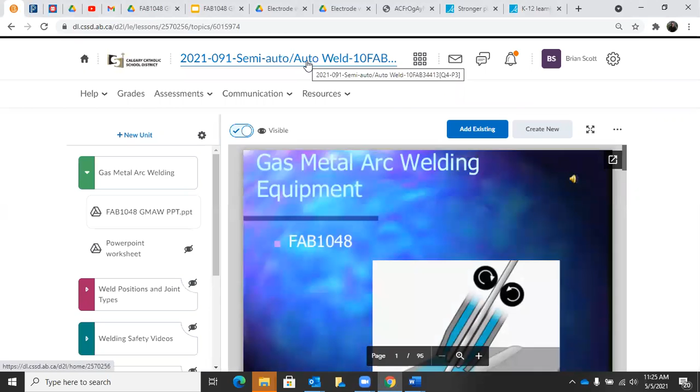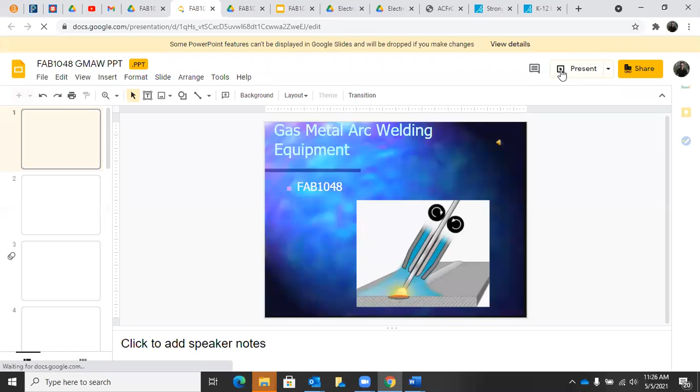So I will start sharing my screen now and we will get this going. So we're going to go to Brightspace. What I've done is in our semi-auto welding unit now, I'm going to switch to student view so you can see what it's going to look like from your perspective. So when you flick into your semi-auto unit, you're going to see this. Just like normal, we're going to go to resources and then down to content. From there, we're going to see gas metal arc welding, that's the unit we're going to work in. And we have our 1048 gas metal arc welding PowerPoint. So this is student view, this is exactly how you would see it. You can pop it out here, and then you can open with Google Slides. And then what I do is I always present from there. You guys have access to this, I've given you all access to it, and this is how I show it for you guys. If you're ever looking at a slideshow and you want to see it just how we do it in class, it's going to be done just like that.

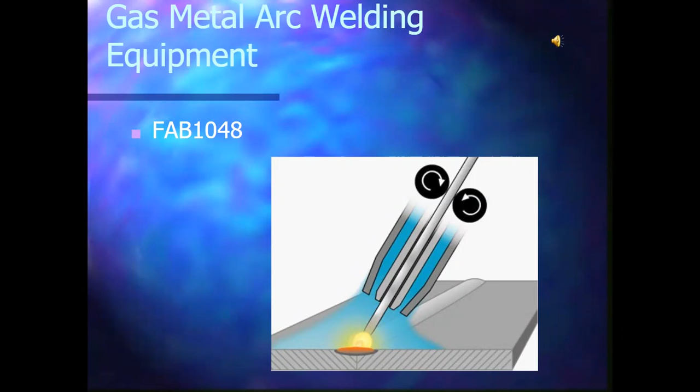So gas metal arc welding equipment, unit 1048. It's awesome, I love gas metal arc welding. It's a neat process, it's not a new process. It's been around for a while, probably since about 1924. A gentleman named Alexander patented it in about 1924. Pretty neat - oh, there's the patent drawing. So what we have here is a lot of very, very similar components to today's modern gas metal arc welding setup. It's taken a bit of a different form, but we have a lot of similar stuff. Now this one back in the day was set up on a positioner, so they'd use an arm to control the height of this above the steel to be welded. And it wasn't as mobile as ones we have today that we can hold by hand.

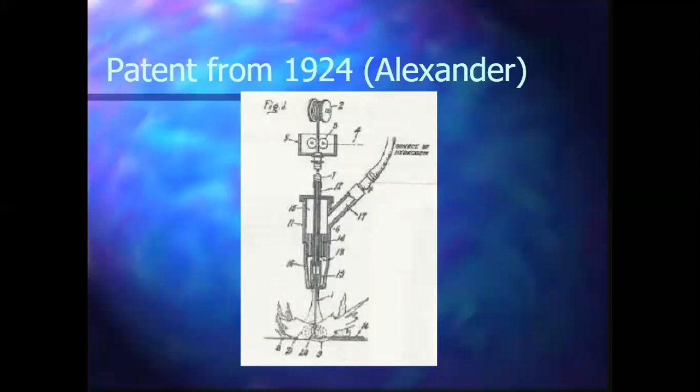But a lot of the parts and pieces are all the same. So we've got gas delivery, we have our contact tube, our contact tip, we got our liner at the back, we got our drive rolls in the middle and our roll of wire at the top. So it's very similar to the process we use today. In fact, the process we use today honestly hasn't changed that much. The components have gotten better, smaller, more efficient, but it's all very, very similar as to what it was back in the day.

Gas metal arc welding principles of operation. We're going to go over what makes this tick and how it works. Gas metal arc welding is defined as a process that joins metal using a continuously fed wire electrode.

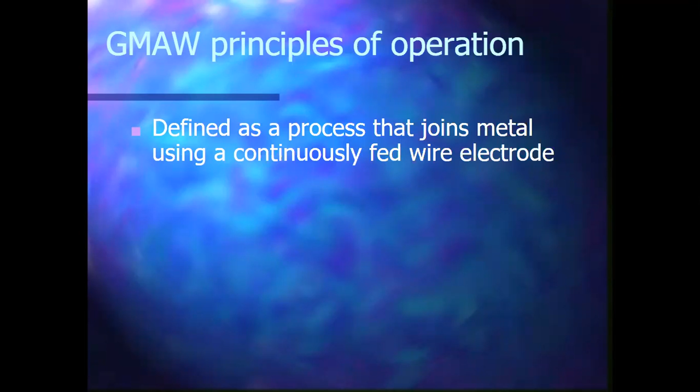The rolls we use in our class of electrodes are generally about 44 pounds. It's a small thin wire, 0.035 of an inch in diameter, and there's probably miles of it on that roll. I've never done the math to work out exactly how much there is, but it would be a neat project, and I'm going to do that one day. We're going to use some mathematics to calculate approximately how much is on a roll of wire. That's pretty neat, I'll have that number for you one day. It's a lot though, I can tell you that.

Atmospheric contamination is prevented by using an externally supplied shielding gas. With these welds, when we take part in the welding process and create that weld, we actually need to protect it from the air we breathe. The air we breathe is not going to be good for the weld. It's got a lot of nitrogen in it, CO2, oxygen, and oxygen in any amount over a couple percent is not good for welds. So what that does is create an effect on your weld called porosity.

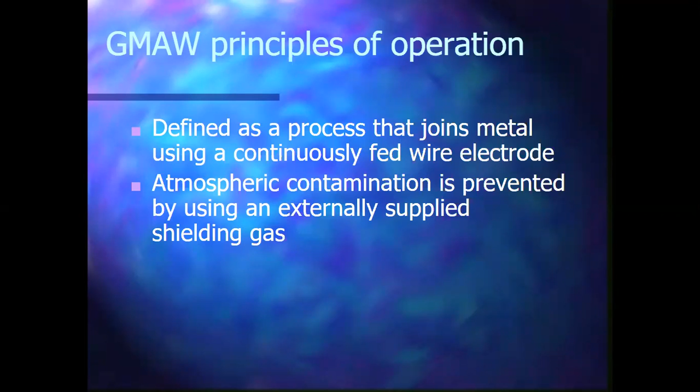Porosity is going to look like you bit into an Aero bar. An Aero bar, as we all know, has a nice smooth outside and is full of holes on the inside. That's what our welds are going to look like when we weld without gas. In fact, there's going to be a little bit of bubbling on the outside too, but the whole inside is going to be full of voids and hollows, and that weld isn't going to have any strength at all. That is a bad defect, probably the most common defect we see as welders, and it's the one we need to know how to avoid.

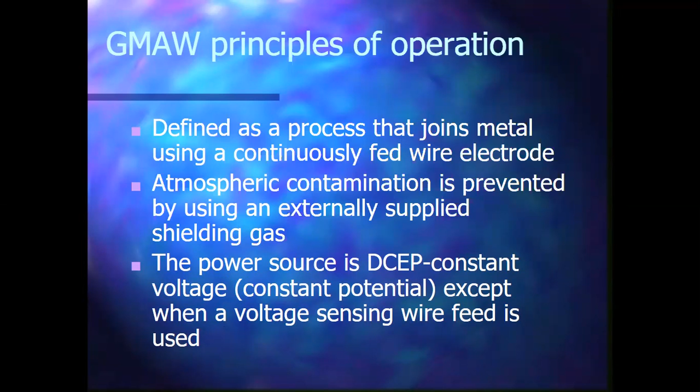The power source is direct current electrode positive. That's what DCEP stands for, direct current electrode positive. It's also known as constant voltage, except when a voltage sensing wire feed is used. There are multiple different systems that we can use to do this, and we're going to go over them bit by bit. I'm going to try to break it down in a way that isn't confusing, because there is a lot to go over.

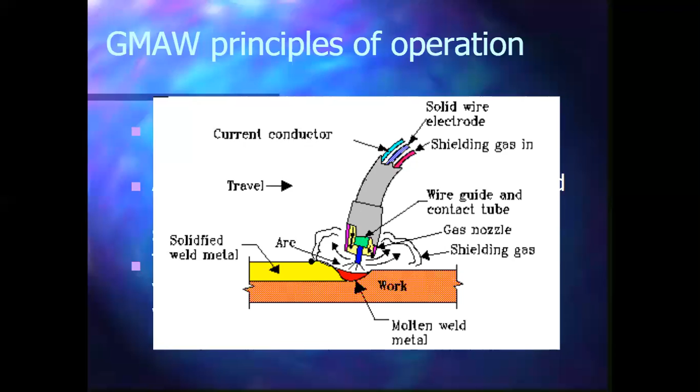So the principles of operation. A lot of people call this MIG welding, and that's a term that's been used forever, and there's nothing wrong with it, except in today's time we're leaning towards calling it gas metal arc welding. MIG is not quite an accurate term because CO2, under the right conditions, is not inert.

So MIG, metal inert gas, is not quite the best term for it. Gas metal arc welding is GMAW. That's what GMAW stands for. In most processes we use the term MIG because it rolls off the tongue nicely. But CO2 is not inert, I've just been over that. The term gas metal arc welding is more accurate.

The whole reason why we use gas metal arc welding, just the welding process in general, is it's quite fast. It's good for production, and if we are manufacturing lots of small parts, it's much more efficient as far as its use of the electrode, that core wire, than processes like shielded metal arc welding, which we'll focus on in the next unit.

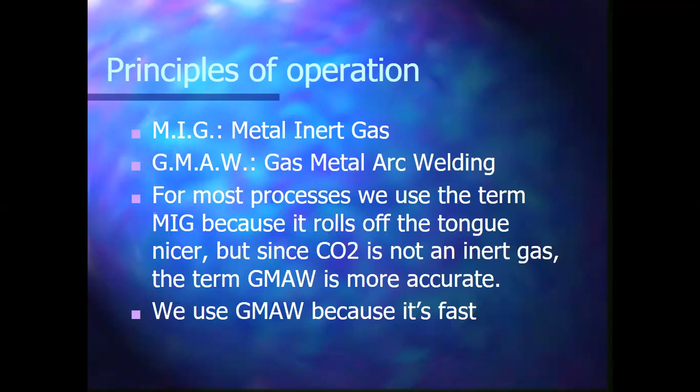So there are some other things in the semi-automated and automated process. I talked about flux core arc welding a little bit. That is very similar to MIG, except the wire composition is different. It's got a different type of wire that we use, a little bit bigger as well. And shielded metal arc welding, stick welding, is a process we're going to focus on in the 1050 unit. I'm not going to explore it too far or go into it any more than we need to today.

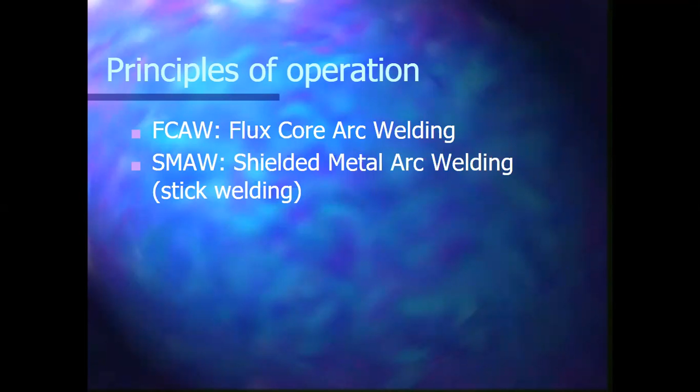So we have equipment for gas metal arc welding, and this is basically all the components you need to set up a hard wire welding system. When I say hard wire, I just mean a solid wire like an S6. S6 is going to be completely solid, whereas some other wires are hollow and have filler in them, and they can be used without a shielding gas. That's the flux core process.

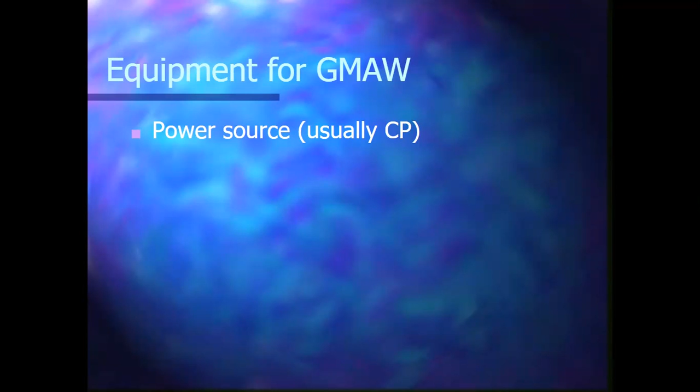So we need a power source, and that's usually constant potential, which is what CP stands for. We need a wire feeder. That wire feeder is basically what drives and pulls the wire off the roll and feeds it out the end of the gun, so it can be energized by the contact tip and then burnt off into our weld.

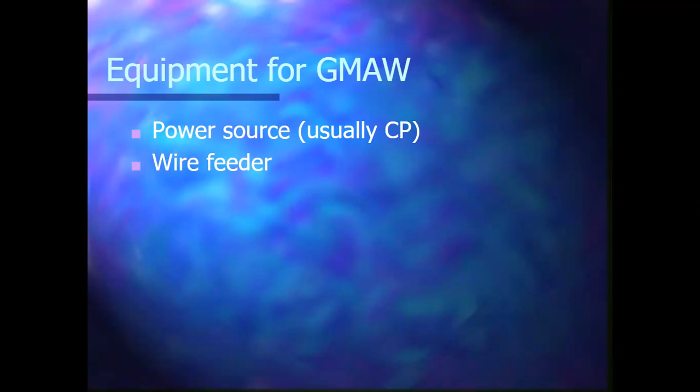We need our welding gun and our cable setup. The welding gun is going to have input controls, or remote controls, basically just trigger controls. You pull a trigger on these guns, it's usually yellow, and that tells the motor to start feeding wire. There's a few things that happen when you pull the trigger, we'll get into that in a little bit.

You need some filler wire, something to weld with, some material to form a weld with. And you need shielding gas and control equipment. Otherwise you will be doing a bunch of welding, but it's going to look like doo-doo because you have no shielding gas and our atmosphere's got in there. We got all sorts of oxygen, CO2, nitrogen up in there.

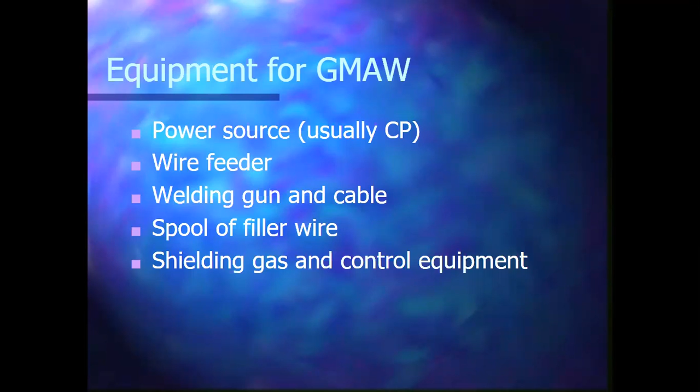I think our atmosphere is like 78% nitrogen. It's pretty crazy. Oxygen's like 21%. Then the remainder is made of CO2 and some other little things. But yeah, it's a lot of bad stuff for welds. Basically, that's the long and short of it.

So power sources, we usually use DCRP. Now you're going to see a lot of acronyms in here, and they can be quite confusing, and I still even have trouble with them, so if you're a little lost, don't feel bad. DC simply stands for direct current. No, it's not the shoe company, I know there's a DC shoe company, but this is not what it stands for.

So DC, as an electrical term, is direct current. RP is going to stand for reverse polarity. You'll see RP sometimes and you'll see SP sometimes, and they both mean different things. RP is electrode positive, SP is electrode negative.

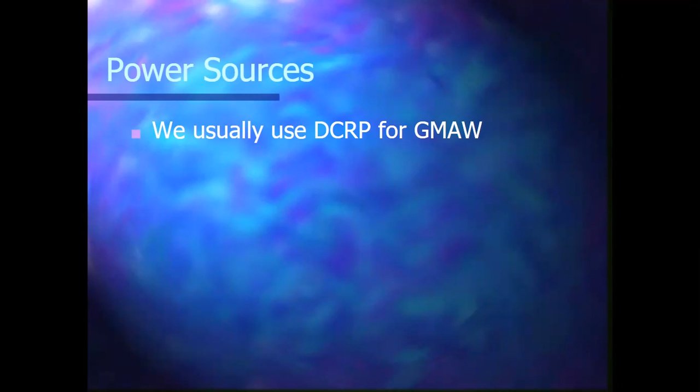We'll get further into that. We'll hit those points again as we carry on.

The nice thing is, a motor-driven generator gives you your welding power and also 120 and potentially 240 power. So you can run tools off of that generator and welder. I don't recommend running them both at the same time because it can be hard on the motor, but generally if you're welding, you're not grinding, and if you're grinding, you're not welding. So you pick up one process, set that down, then start the other.

Transformer rectifiers, that's a type of welding machine where we bring in a low input power and step it up to a bigger, usable power with a transformer. We also have inverter technology, which does a similar thing on a very small scale. They're light, kind of the newer technology ones.

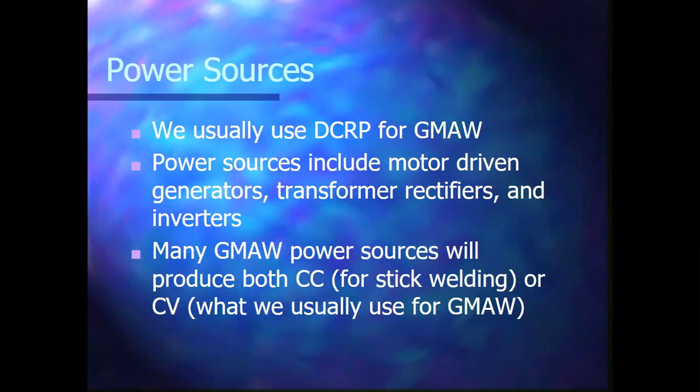Many gas metal arc welding power sources will produce both constant current, that's what CC stands for, for stick welding, and constant voltage, which is what we usually use for the gas metal arc welding process.

Here we have a general picture of a gas metal arc welding gun. We have our connector on the back, which is going to have a few pins, and then we have a positive and negative lead here.

Now, some of these guns can be water cooled. In fact, this gun may be water cooled. Looking at it, it's got a sheath and a cover over it. If this gun is designed for high amperage, something like metal core or big flux core, it's most likely going to be water cooled, because electrical components and heat don't go well together.

I don't know if you guys have ever left your phone out in the sun, but you'll see a temperature warning, and it'll shut down all functions basically until it cools down. That's to protect its internal components. The same thing has to happen on these guns. We can run a lot of power through these guns, and when we do that, we start heating up components and wearing things out. We can even start burning up components, and these guns are not cheap.

So some of these guns, like you see here, have these two little hoses on them. It's an inlet and an outlet, and that's for a cooling tank and a water pump. This connects and it will circulate cool water through the gun, kind of like how a radiator system on a car works. It'll run water through, cool it in a radiator system, and pump that cooler water back through, maintaining a nice usable temperature for the gun.

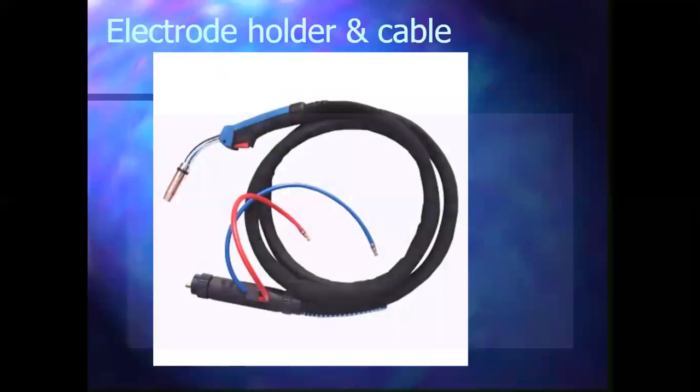Gun and cable assemblies are rated by their current carrying capacities. We have some examples in the shop here of some very small, light hobby machines that are good for maybe 100 amps, and then we have some big ones rated for 300 to 400 plus amps. We generally don't run them that high, but you'll notice all the circuitry, all the components are much bigger and heavier.

It's kind of like looking at a small quarter-ton pickup and a 1-ton pickup. You're going to notice size differences. Everything's going to be bigger on the 1-ton pickup, and that's simply to help it perform the task better. The same thing applies to these welding gun and cable assemblies. You don't want to put a great big heavy load in a little quarter-ton truck, it's not going to work well, you might break it. Basically the same thing applies with small welding guns. If you try to run big amperage with a small welding gun, you're going to cook that sucker real quick, and then it's no good for you.

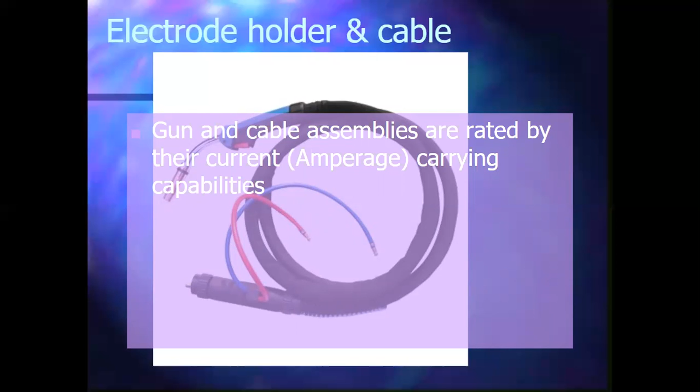Cable assemblies are designed to carry the shielding gas, the current, the wire through a liner, as well as wires for the control mechanisms such as the trigger. So there's lots going on in those cables. It's not just a hose and a wire.

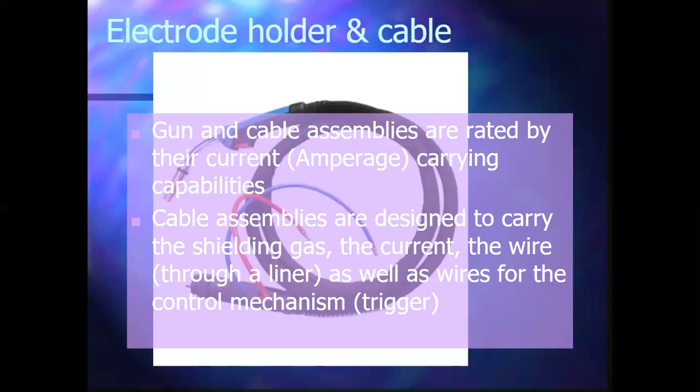So the filler wire we have is pretty neat. It's cool technology. Designations—well, let's back this up a second. These filler wires are classified into two main classifications.

AWS is American Welding Society, and CSA is Canadian Standards Association. These are the bodies that regulate the production of these filler wires. The wires get made, then tested to a certain standard. AWS has their standards and CSA has their own. You've heard me talk about CSA before—it's that green triangle on the steel toe boots. It's the people that test our safety glasses, making sure everything meets standards before it's sold to the public.

Basically, manufacturers make the wire, these companies test it, and they say yep, you're good, you met our standards. So it can be sold to the American and Canadian markets if it has both these designations.

So the wire we most commonly use here is an ER70S6. That is a solid wire. It's copper colored because it has a very thin copper coating over the wire. The wire is pretty much all steel, but there's a thin copper coating to help protect it from corrosion. Sometimes here in Alberta, if I had a roll of bare wire sitting out on a welding machine for a few months, it would start to rust pretty good. We have our seasons—spring is a little more humid, it's wet out.

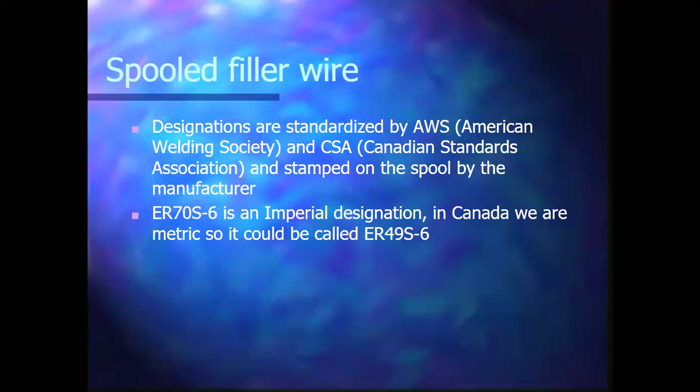So what we're going to do is back this up just a little bit. Here we go—a little bit of info on what that number means and how to read it, because right now it probably looks like a foreign language to you. But as we get into it, we're going to break it down and hopefully bring a little bit of light to it so you can understand it a bit better.

So we're going to start right at the top, and we see we've got two designations: S or T. S is solid, meaning if you cut this in half, it's steel wire the whole way through, with a bit of copper coating, but solid steel the whole way through.

Some of these wires are a T, like a T11, a flux core wire. You could cut it in half, you'd have to pry open the end a bit, but that wire is actually rolled up like a burrito. Inside is a flux, with metal filler components, gas forming components, and cleaning agents as well. The flux core is a pretty neat process, and the wire is literally like a little burrito.

We're going to look at this first digit here, an alphanumeric designation. We got E, E stands for electrode - that's pretty simple, that's what you pass the electricity through to make the weld. R just stands for rod. Even though we call it a wire, technically it's just a really skinny, really long rod that we've decided to wrap up on a spool. So if you see ER, it's just electrode rod, and you'll see that with like E7018. That's a stick welding rod, a very common welding rod.

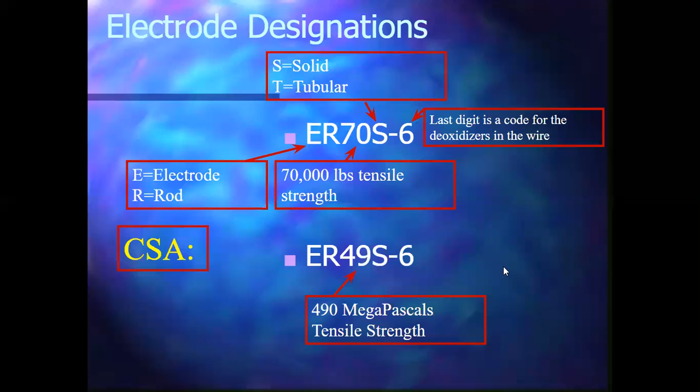So the top one's AWS. Shielding gases - this is what protects our weld from atmospheric contamination. Shielding gases can range from argon to helium to CO2 and even oxygen. Now, oxygen sounds crazy, but in small amounts it does wonderful things for our welds, and when I say small, I mean 2 to 3%.

So some of these gases will be just a single gas. If we're using TIG welding, we're using argon for back purging. If we're running a bunch of MIG welding and we want to keep our costs down on gas, we can run straight CO2. Straight CO2 doesn't give us a very nice bead appearance, so what we do is use a bi-mix, two gases on our MIG welders, to give us a nice appearance - a 75-25, running 75% argon and 25% CO2 mix.

So that mix is called C25 or Star Gold. Every manufacturer is going to have their own name for it, but the recipe is pretty much the same. These are recipes that people have found to work over time, stuck with them - they're tried, tested, and true. So I use C25, that's a 75-25 argon CO2 mix, in our shop.

Sometimes you get tri-mixes, three things, and even quad mixes. Sometimes you'll see mainly argon, a slight bit of CO2, a little bit of oxygen, and some helium in there. Some of these are more specialized. I've never had to do anything like that.

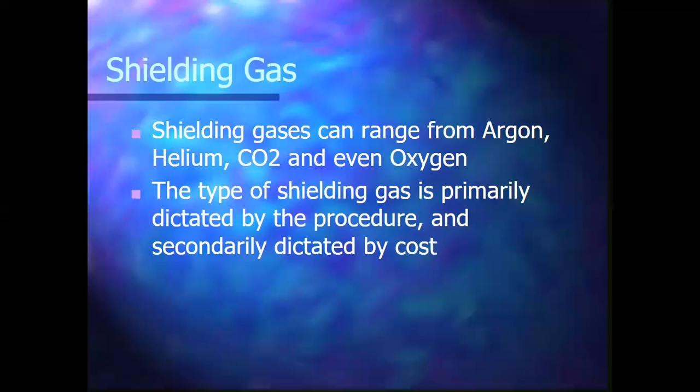If I'm building a bunch of stuff that is going to get hidden somewhere that no one's ever going to see, and doesn't necessarily have to look the prettiest, definitely you can buy three bottles of CO2 for one bottle of C25. It's way more cost effective. So yeah, just think about it that way. CO2 is prominently used because it's cheap, that's why.

Okay, so when you get those bottles though, those bottles are sitting about 2,000 PSI, maybe 2,200 PSI sometimes. So a lot of pressure in there. So we need to have a device that takes that big bottle pressure to a working pressure, and that working pressure is what comes out the end of the gun. That device is called a regulator.

That regulator and a flow meter. The regulator basically sets the bottle pressure down to a working pressure, and the flow meter maintains that constant flow of gas out the end of the gun. Some of these are combined, some are separate, it really depends on the setup. There's multiple different types of setups, but the ones we have in class are fairly easy to operate.

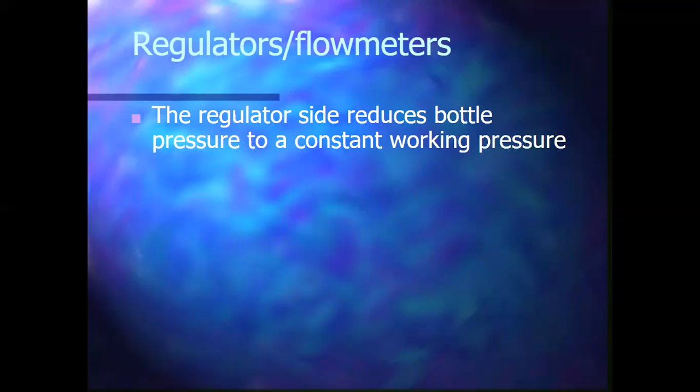So you're gonna see a hand wheel on the top of the bottle. You're gonna open that up and there's gonna be two dials on the regulator and then a hand wheel on there. One will show your bottle pressure, one will show your working pressure. These are quite simple to use, and they're very nice because they hold their position, they don't drift, they don't creep.

The flow meter side controls the rate of flow. It can be adjusted by the operator and displays flow in liters per minute or cubic feet an hour, so it'll be LPM or CFH. I generally use CFH, and I use 25 CFH as my flow rate for the welding that we do, 25 cubic feet an hour of gas.

Here's a little question for you guys. Flow meters are usually gas specific, do we know why? There's no wrong answers on this one, so don't be afraid to say something. No one's got anything? All right.

So the reason flow meters are gas specific is because gases have different specific gravities. So helium, what do we know about that? It floats balloons, right, lighter than air. About CO2, a little bit heavier, right?

I don't know if you guys have ever seen it on YouTube. They'll take a fish tank, fill it up full of CO2, and float a paper boat in it. Looks like it's floating. Well, that's because it's contained within that vessel, the fish tank, and it's displaced the oxygen in there.

We suck back a bunch of helium into our lungs, not recommending that you do that, and we get that high-pitched voice, right? Density comes across our vocal cords differently. Then we do what, I think it's sulfur hexafluoride or something like that, and we get that really deep, dense voice. You're breathing in something quite heavy. I don't recommend doing this because what's happening is you're displacing standard oxygen from your lungs, and we need oxygen for our body, respiratory systems, our brain to function. A short little haha, that's kind of funny. Doing it once or twice might be okay, but don't do this long term. You're basically going to be killing off brain cells and damaging yourself. Not something I recommend. Different gases have different specific gravities. That's the answer to that one.

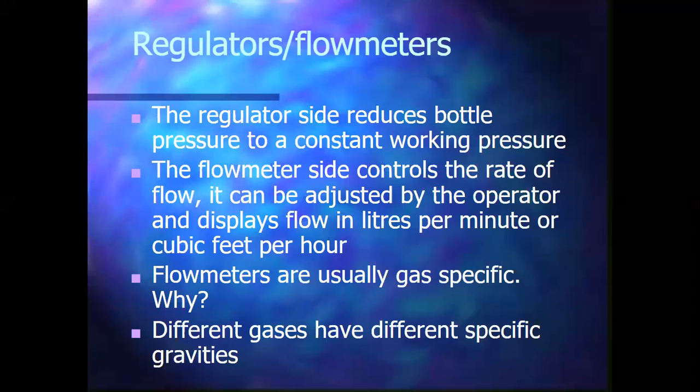Too little, you're getting porosity. Too much, you're getting porosity. That's because there's turbulence coming out of there. So gas is kind of like water - it has to be unobstructed when it flows.

So the Bow River, normally, flows nice and calm - things are awesome. But in 2013, great big flood - the river was raging, water flipping everywhere. You got white water in a lot of places, big waves, lots of turbulence. Same thing happens to gas when it flows in the air. If you get the right amount of gas, it flows nicely and calmly over your weld. If you get a whole bunch too much, it's ripping through there, hitting the bits of spatter on the end of your cup, swirling, not covering your weld fine, and getting a bunch of oxygen in there. It's kind of like when people talk about whitewater rafting - the water gets turned up so much it takes oxygen in, and there's a bunch of oxygen bubbles in the water. That gives it that white effect.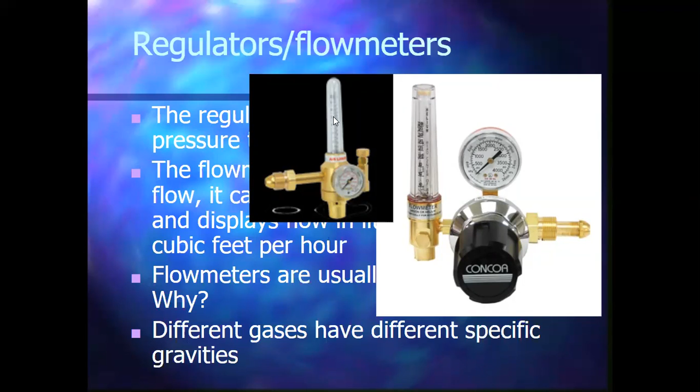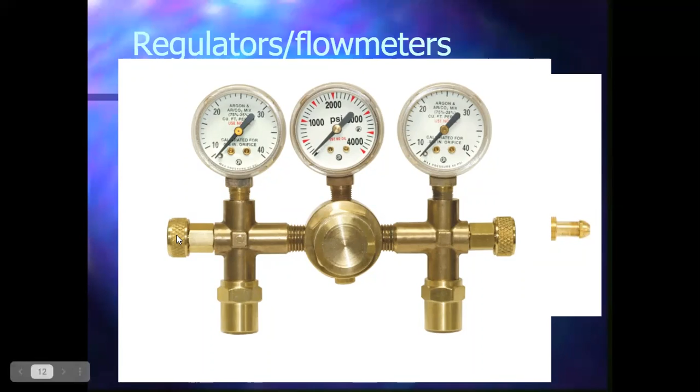We can also get these for more than one welding setup. Sometimes people will set up welders where they weld two different things, or they've got two different welders, and they'll run them off one bottle because they're both using a process that uses the same gas. So you can independently control these - you've got one that can come out the left side, one that can come out the right side, and they can be independently controlled via these little hand wheels here. It's kind of cool - saves us buying extra equipment.

When we are welding, we're getting some neat metal transfer, and that metal transfer is a cool process. It actually happens in 3 different ways. With this type of welding that we're doing, we're going to stick to one process, and that process is short circuit welding. Short circuit welding is where the wire physically comes out of the gun, makes contact with your weld puddle, touches - there's an electrical short, it pinches that off when it heats up using the electrical arc, retracts, and then comes forward again and touches that puddle. It basically touches that puddle a whole bunch of times really quickly, something like 300 times a second. It's very fast, but it has to physically make contact with that puddle to create the short to weld.

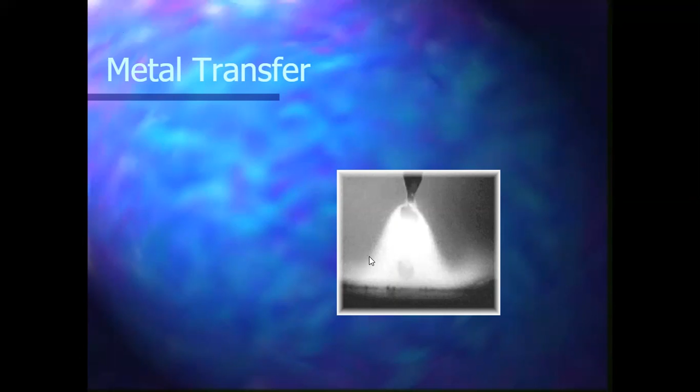There are other processes like globular transfer. It basically throws globs of metal across the arc, and that's actually what you're seeing in this little picture here on the front of the screen. You see a glob ready to get tossed off the end of the wire. This is actually the end of the wire, this is the electrical arc or fan, and here's the glob just about ready for touchdown on the base metal. Pretty neat.

So we got short circuit, we got globular, and we got spray transfer. Spray transfer is a lot like globular transfer, but instead of big globs of steel across the arc, it's shooting a fine mist of metal across the arc. Hundreds of small individual little droplets of steel. Very, very, very small.

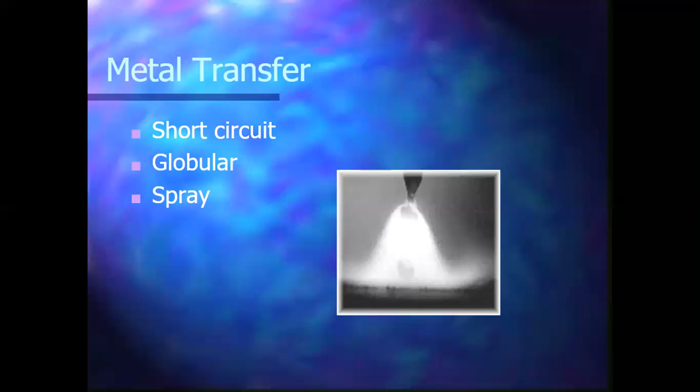So we're gonna talk about short circuit, maybe the 3 processes, and get you out of here for the day, but we'll see where we end up at the end of this one. There's a fair amount to go over, so this will take a day or 2, the slideshow, but we're gonna get through it. So, short circuit metal transfer.

Here's the process. Drop your helmet, you pull the trigger, you're ready to weld. So the trigger is pulled and the wire makes contact with the base metal. So let's back up a little bit before that. When you pull that trigger, what happens?

3 different things. That trigger tells the drive motor, all right, I want some wire, give me wire. That drive motor says, all right, sir, you got it, starts feeding you wire. Then also at the same time, it sends a signal to the gas solenoid. It says, hey, I'm going to do some welding, I need some gas to go with it. Gas solenoid says, you got it, start sending that predetermined amount of gas down the gun to your weld.

The first one activates the wire, so wire starts coming up. Second one is the gas starts coming up. Third one is it sends electricity to the end of that contact tip. The end of the contact tip is right at the gun, that's what transfers the power from the machine to the wire. And it says, hey, we need some power down here to burn this off. So that fires up, energizes too. Without those 3 things happening at one time, you don't have a weld.

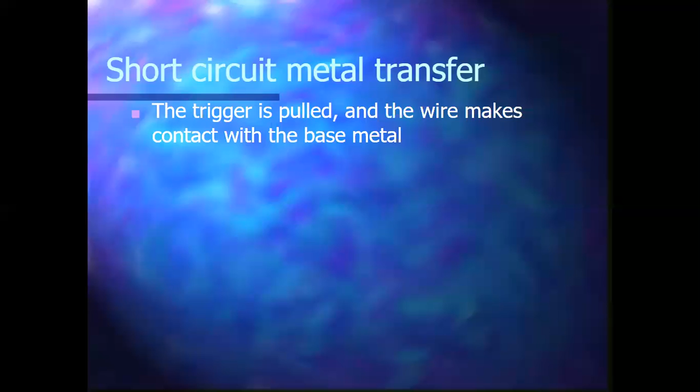So what happens is when that wire comes out there and touches the steel, makes contact with it, the voltage drops down, the amperage spikes way up there because the machine is trying to maintain this arc. It had this fan going, but when that wire touched the steel, it shut that fan down. So that creates a dead short. The voltage drops, amperage spikes, that machine's trying to clear that out because it wants to maintain that arc and keep that electricity flowing.

What happens is called a pinching effect. This is where it melts a wire off the end, or melts a little glob of steel off the end of the wire via a pinching effect. Once it's pulled that off and it opens up the slightest of little gaps between that ball of steel you just melted off and the end of the wire, that fan, boom, pops right back open again.

It goes, yes, all right, amperage starts to drop down, arc voltage pops up, and it's trying to hold that fan all nice. And it does a good job of that. But what happens again is as that wire gets closer to that steel, because it's always continuously feeding, that wire makes contact with the steel again, boom, voltage drops, amperage spikes up there. It says, we got to clear this dead short. Pinching effect happens, pulls that bit of steel off, voltage opens up again because you got that arc, the fan opens up, life is good for a very, very split second again until that wire comes down and touches the puddle again. That's basically how it works.

It's a neat process. It happens hundreds of times a second. So very, very quick, but this is how it works. The wire is fed faster than the arc can burn it off, and the wire makes contact with the base metal. That creates that dead short we talked about. So that's when the voltage drops, amperage goes way up, it says, hey, we need to clear this jam up, and it happens again and again and again and again.

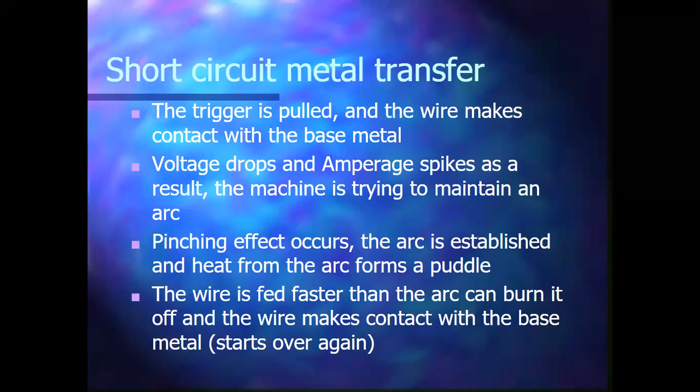So when we get in here and do some short circuit welding, you'll hear a ripping sound, like an electrical rip. That is that process happening very, very, very quickly. We'll tune our machines, you can tune it by sound, I'll show you how to do that. We'll tune these machines in and you will be able to hear it. And then we'll show demos of what's good and what's not, all that fun stuff. I love doing this.

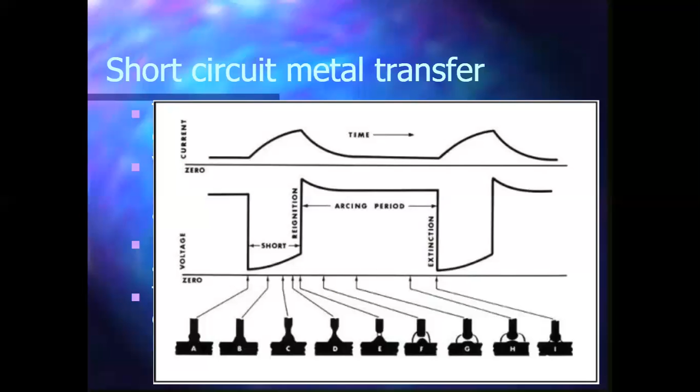So what we can also have in this, basically in the system, are some parameters that aren't good because we manually set our parameters. We tell the machine how we want to weld. We basically create our own welding recipe when it comes to these machines. The recipe is pretty simple. We put in our gas, we put in our gas flow rate, we put in our wire feed speed, how much wire comes out the end of a gun in a minute.

Then we put our voltage. The voltage is what helps burn this off. So those are our inputs that we have. So we got a 4-piece recipe, but we need to know how to manage to create these welds.

So what can happen is you have too much slope in the workpiece here. And slope is referring to voltage and wire. So in some cases, we can turn that wire feed speed up too much. And instead of having enough power to burn this off, the wire smashes off the workpiece, and it's called stubbing.

And it basically just bounces, bounces, bounces. Sounds terrible. It feels terrible on the gun. It looks terrible through a welding helmet. You got chunks of wire breaking, spitting off everywhere. It's not creating that weld you want.

On the other side of that, if your wire speed's too low and you've got a very high amperage, what's going to happen is that wire is going to come down, make contact here, and the amperage is basically going to blow this wire up. It's going to basically explode off the end of the gun.

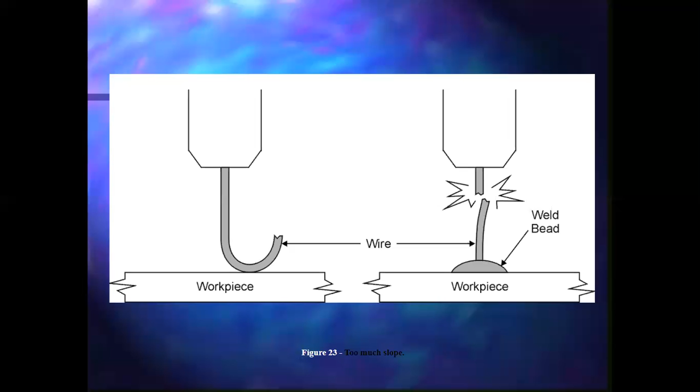So the way to fix that is turn the amperage down or the voltage down, or turn your wire speed up. There's 2 ways of fixing those problems. I'll show you that when we get into class.

So globular transfer. That sounds like something we're going to get into tomorrow.

So talked a lot today, got a lot going on, going through this kind of a little slow, but there's a ton of information here. I want to cover it well for you because there will be quizzes on this. There is stuff coming up, and all this is being recorded, so you have this for reference material. And that's why I'm kind of going through it nice and slow, explaining things a little more in depth.

Since I can't have you physically in the class and show you demos, normally I've got a machine out while I'm doing this demo, and I show kids all the effects of different things and stuff like that. But I can't do that. So I'm going through it a little slower today. We're going to basically wrap this up here and stop the recording. So any of you guys.